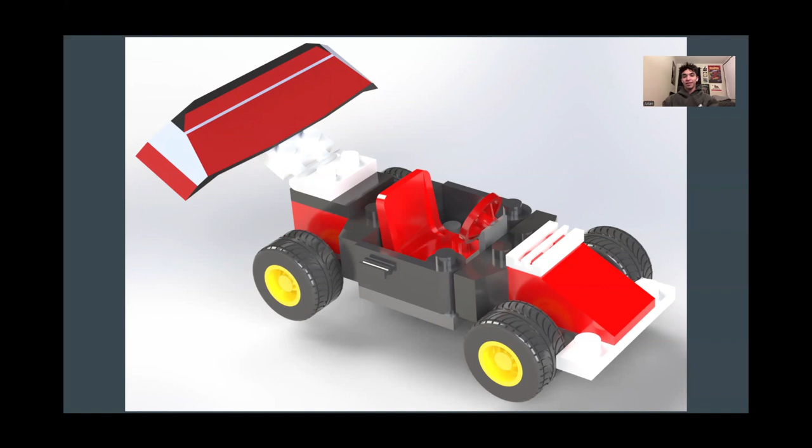All right, this is an assembly of the Lego car. This is what we built. I think this is the rendered version. And here is the exploded view of said assembly.

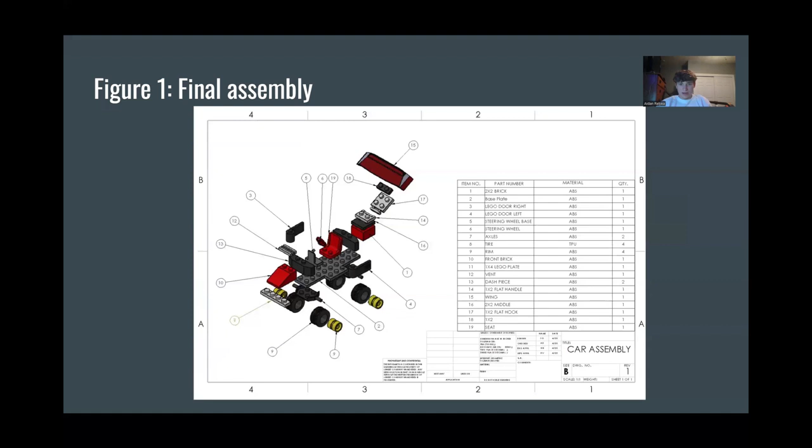So this is our final assembly with our exploded view and the standard parts list. There's a bubble to every part, and that corresponds with the table we have on the right.

So this is a video of our Lego car being assembled like it would be in a Lego video game.

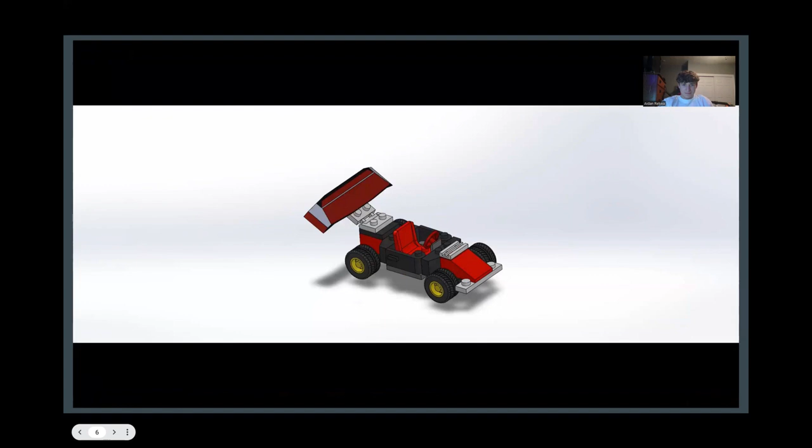I don't know why it's playing twice. Okay.

And so now we're going to take the opportunity to talk about the different pieces and parts that we each designed. Starting off with the 2x2 brick, this was the first block that we designed for our assembly. This block was a literal and figurative building block. It taught us a lot of the patterns that we would be using for the later pieces of the assembly, and it also gave us a reference for the dimensions.

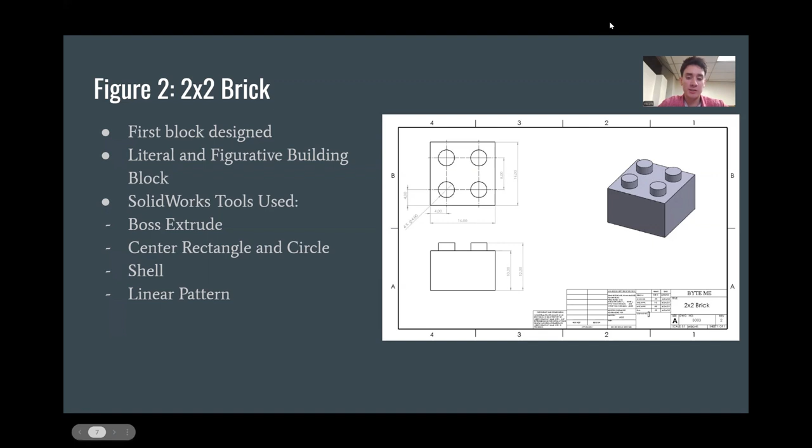And the SolidWorks tools used for this 2x2 block were the boss extrude, the center rectangle and circle tool, the shell tool, and the linear pattern tool.

And then for the next part, the base plate, this was the foundational piece of the car assembly. This was the piece that gave the team a foundation to expand our ideas upon what kind of pieces we'd like to add on to the car.

The base plate was revised twice due to misalignments with other pieces that caused a need for the base plate to be revised. And the tools used for the base plate were the boss extrude, the corner rectangle and circle sketch, linear pattern, the mirror along an axis, and the shell tool.

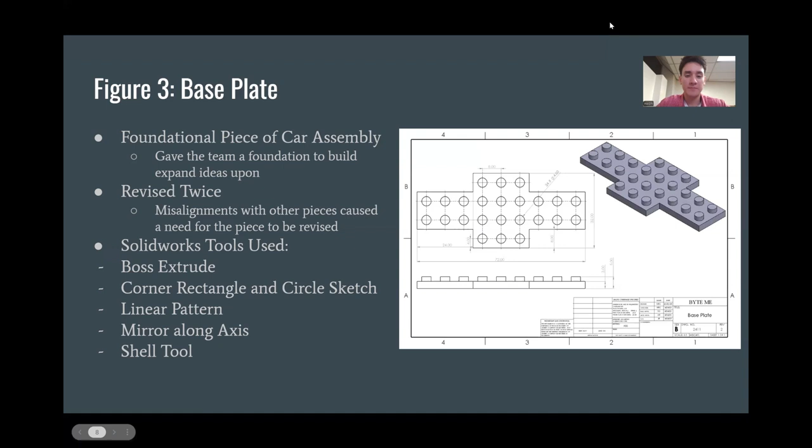All right, so the next parts are the doors. Looking at the left door, there's a few design considerations. First, it had to fit the whole style of the car, didn't want to look out of place. It needed to be functional, so the handle needed to be able to rotate in and out, and work within the given boundary so it doesn't stick out of the car and make it look weird.

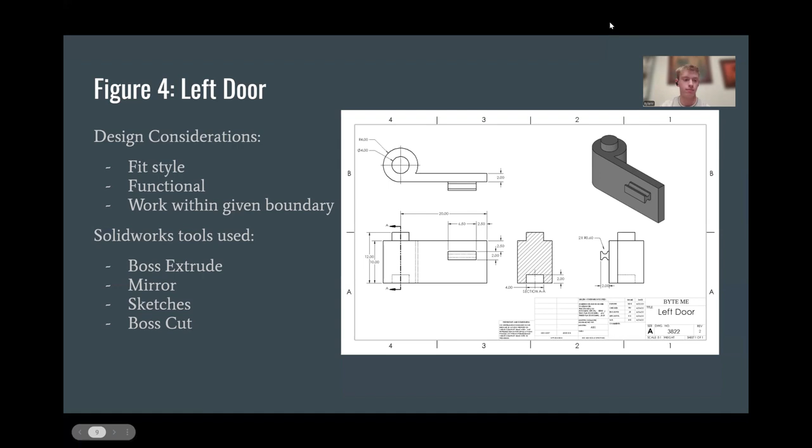The tools used were pretty simple: boss extrude, a mirror for getting the left and right door, and the boss cut. And then for the right door, pretty much the same thing.

All right, so here we have the steering wheel base, which acts as the mounting point for the steering wheel itself. When designing this, we had to consider both the height and the tilt angle of where the actual steering wheel attaches, just to make sure the wheel was as ergonomic to the driver as possible. The tilt especially adds to the comfort and mimics real driving positions.

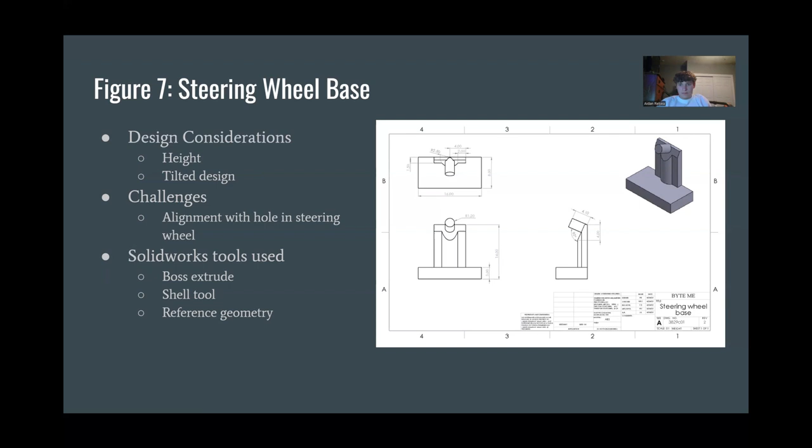A key challenge with this was making sure that the hole at the top of the base aligned perfectly with the center bore on the steering wheel. So to do that, I used reference geometry to make sure everything was centered and accurate. With this, building it was pretty simple. Used the boss extrude for the base, and the shell tool to hollow out the bottom to give room for the supports and make it that Lego-like.

Next, we have the steering wheel. To do this, we went with a classic circular rim paired with a three-spoke hub, which balances simplicity with strength. The center bore allows for mounting to the base, and the whole design focuses on symmetry and comfort for the user. The steering wheel was designed so it can be easily interchangeable or swapped out and upgraded with any other steering wheel. To create this, again, it was pretty simple, didn't use too many new tools, just the revolved circular pattern and fillet tool.

Overall, these parts helped us in the project with focusing on real world usability, integrating that into our parts.

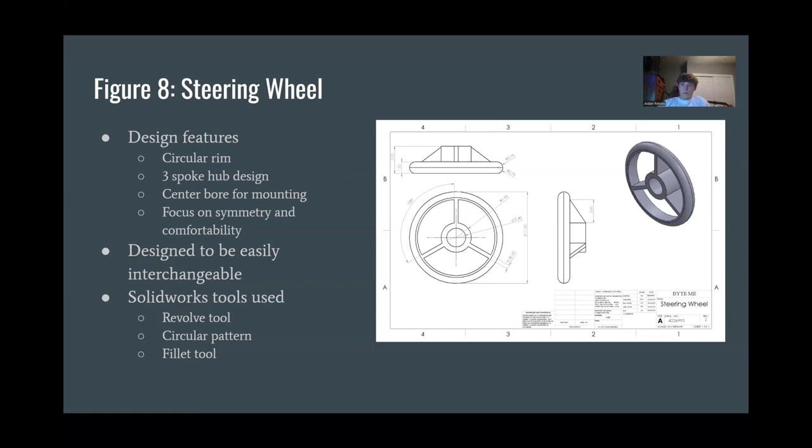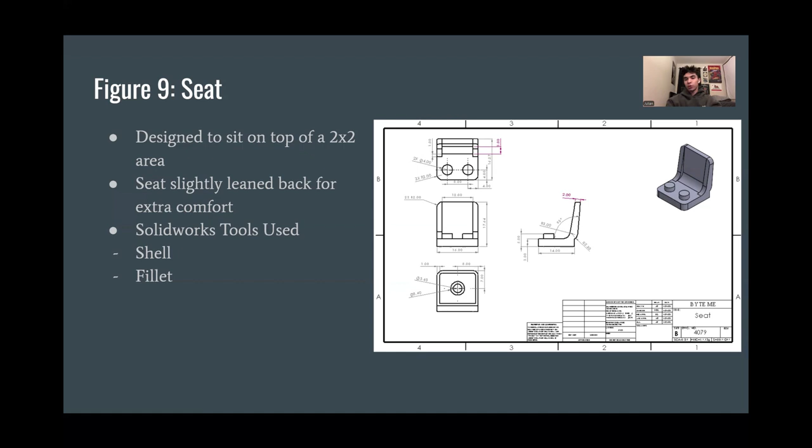The main challenge of this part was that the backrest of the seat is slightly angled back. This was revised once because that angle was interfering with another part, so that had to be fixed. Didn't use too many new tools, just a shell and some fillets for the curves.

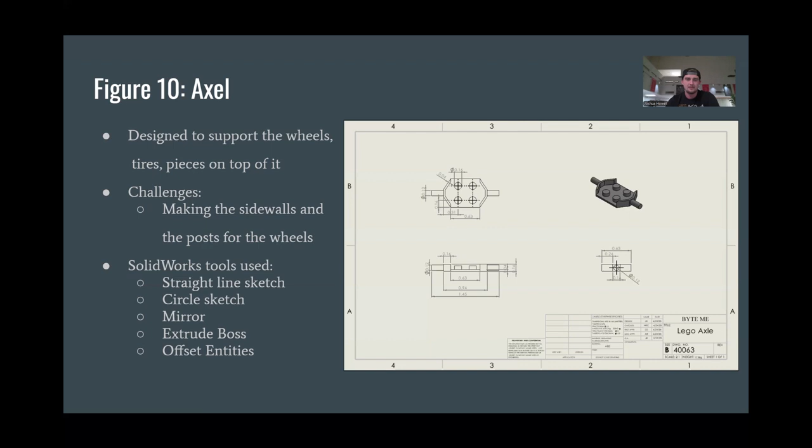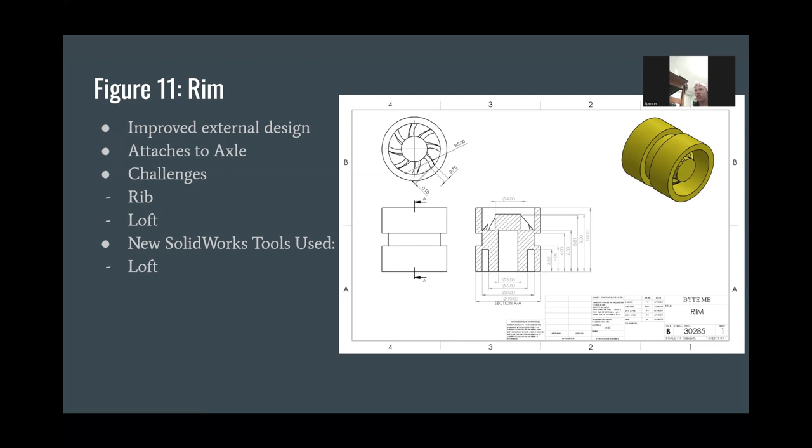The main challenges were trying to get those inner spokes. We tried using rib tools, but it wasn't working too well, so we tried using the loft. The loft gave it this very nice turbine-like look, but it also took a long time to learn how to do. It basically attaches two different parts of two different drawings on different planes using a guide curve, giving it that really nice arched look.

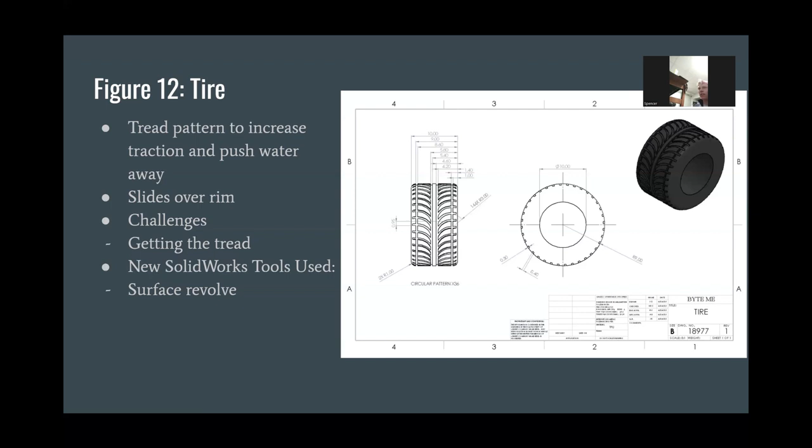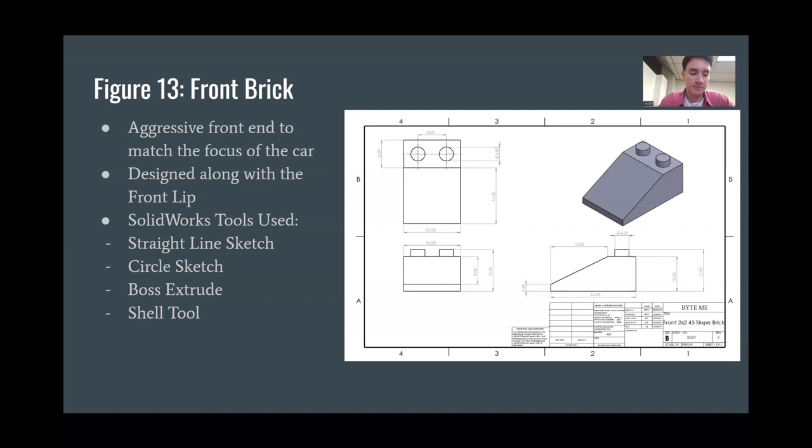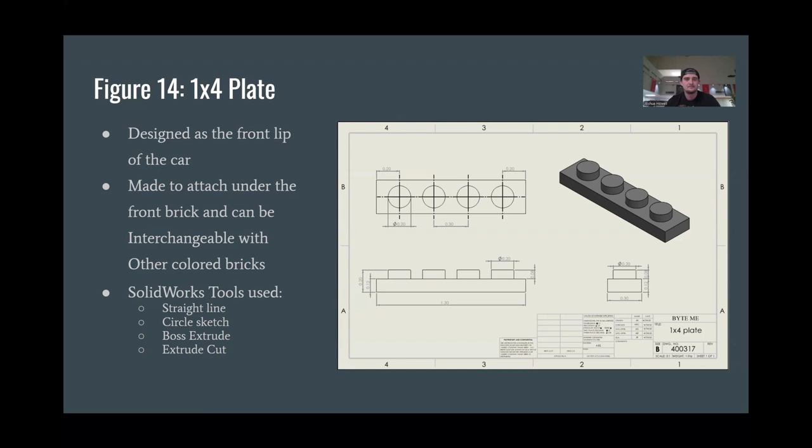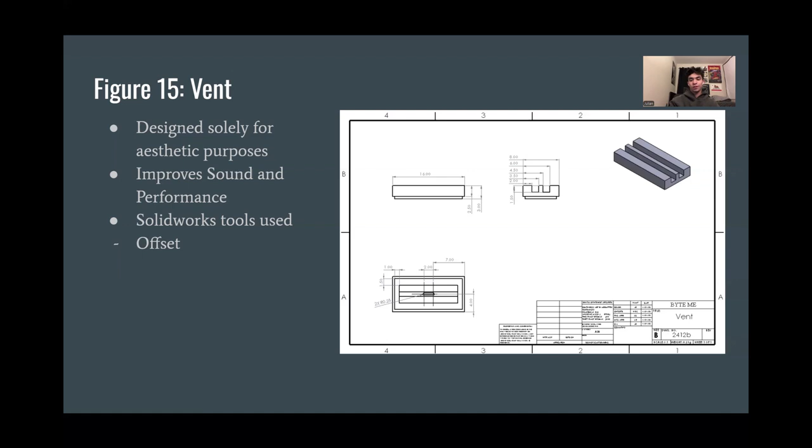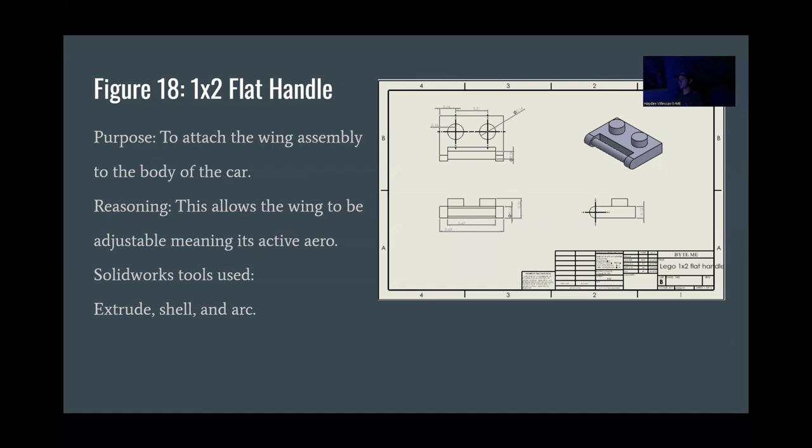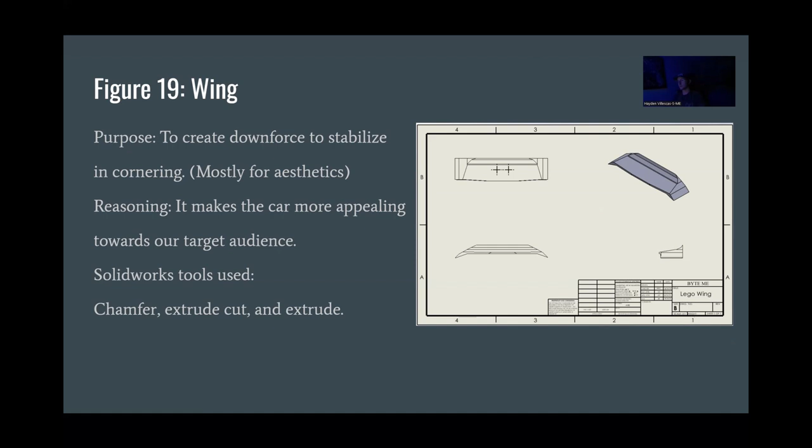From a modeling perspective, we used several key SolidWorks tools: the chamfer tool to redefine edges and add detail, extrude cut to shape and carve out material, and extrude to build the main structure of the wing.

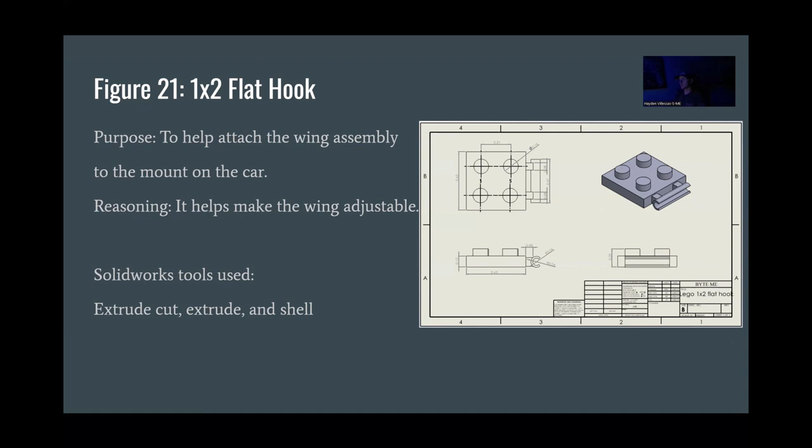In SolidWorks, we utilized a few central tools to create this part: extrude to form the main geometry, extrude cut to remove material where needed for fitment, and shell to reduce weight while maintaining strength.